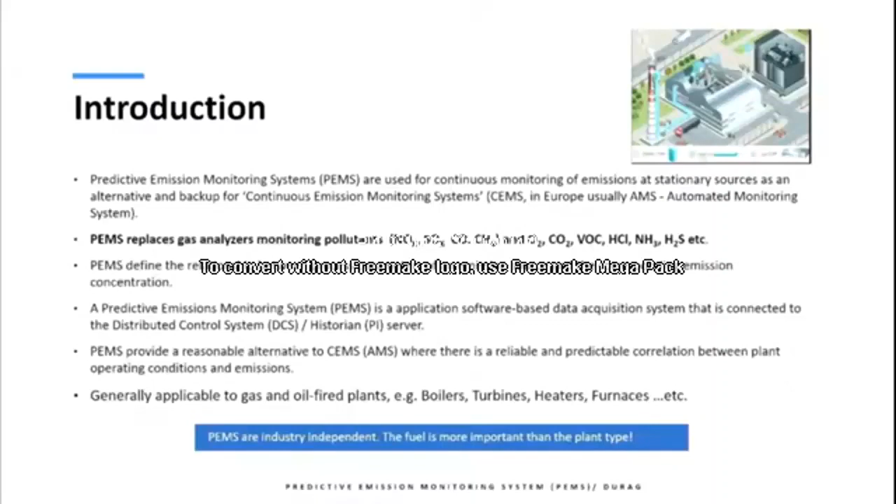But what I want to give you is the experience which we want to share with you, how you overcome the challenges with this technology and how you can make it beneficial to replace any CEMS gas analyzers which you might have challenges with.

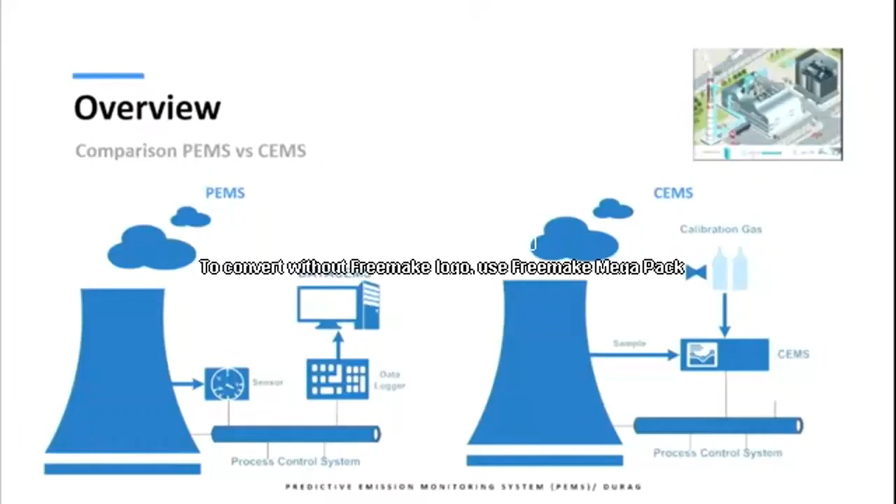Just to give you a first overview, on the right side you see the traditional system, where you have gas analyzers and sampling systems, and on the left side you see the PEMS solution, for example the Durag data CEMS. You can imagine that on the right side, with gas analyzers, I face a lot of issues with the sampling system, the gas analyzer itself, the calibration, and the maintenance.

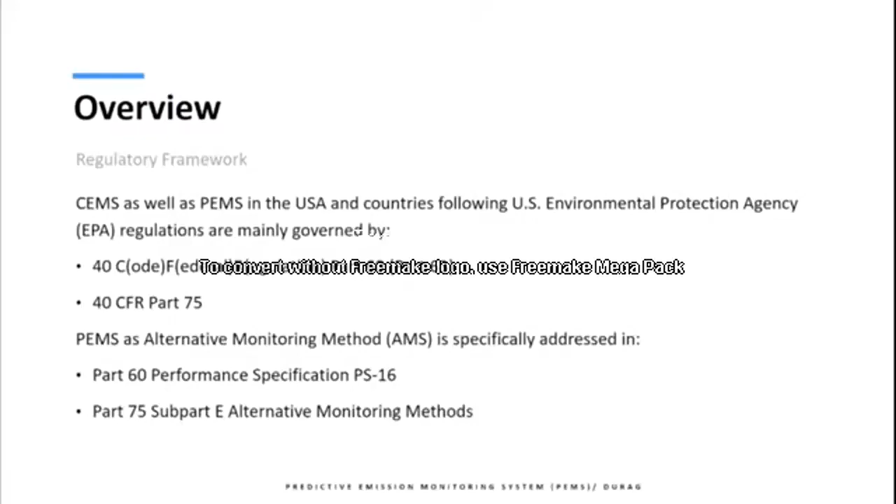The first question to answer: is this approach accepted worldwide? The answer is yes. There is a standard from the US EPA, Environmental Protection Agency, the Code of Federal Regulations 40 Part 60 or Part 75. These are the two major ones implemented outside of the US. Part 75 is more stringent, therefore we advise it mainly for companies inside the US, because there are very stringent requirements which often cannot be met by companies outside the US.

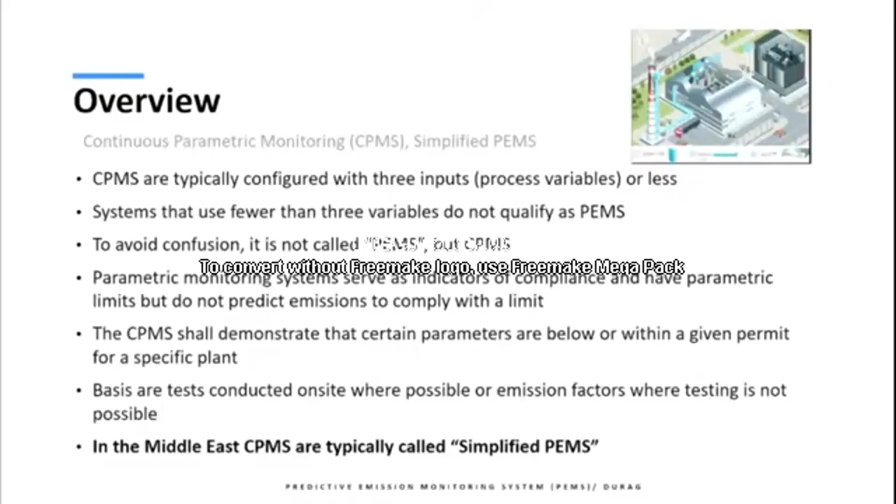Just to clarify, there is also something called simplified PEMS. This is a light PEMS where you just use three process factors or less, and it is often used for flare monitoring. But this is not qualified for environmental emission monitoring, so this is not the PEMS I'm talking about here. It's just for indication, not for reporting. You cannot use it for reporting to the Royal Commission or the environmental authority. It's just for indication, or in case you do not have enough process information to make a sophisticated PEMS model.

How is the model built? There are four different stages, starting with the creation of the PEMS model and ending with the finalization and implementation of the system in your plant. During the first stage, we need to collect the data. How are these data collected? You need a mobile CEMS, a mobile gas analyzer, collecting the data from the stack.

There are specific requirements, and I always urge and remind our clients to look into Performance Specification 16. It's just a 20-page PDF file from the US EPA. It's very simple, and it describes what's required to collect the data and how the load has to be varied, because you cannot collect data at one load and then expect your PEMS to be accurate.

And the same also with the type of fuels. If you are changing your fuel, this has to be incorporated within the PEMS modeling from the beginning also. And in the finalization stage, of course, the PEMS has to be sealed against any manipulation, because the Environmental Monitoring Authority wants to be sure that this data is true and that there is no manipulation from inside the plant itself.

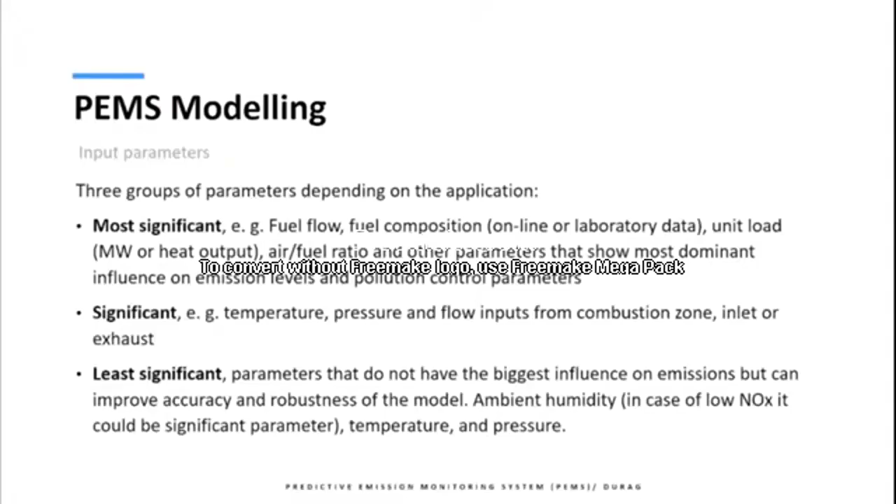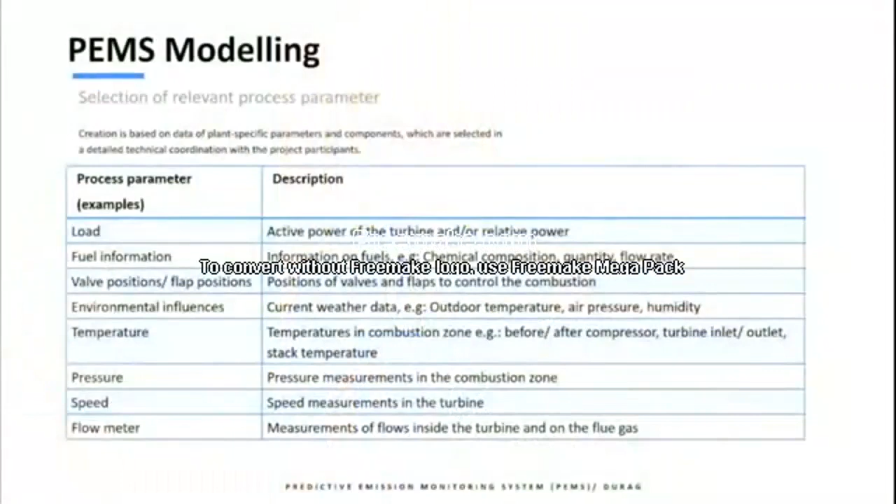And this, you can get the data from your weather station, including, for example, the humidity or the temperature outside, because these have some effects also on the reading of the system. This is just one example for a gas turbine, the different process parameters which are selected there. And here to give you an overview about the PEMS envelope.

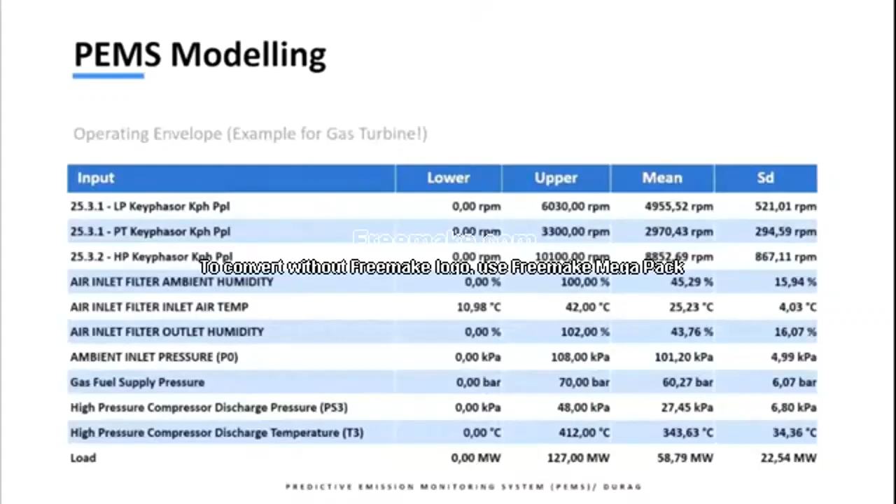And of course, most of these parameters are also important for your process, and you want to know about them, and the system is checking them every minute. Every minute, the sensor validation component, this is part of the software, is active and checking the data.

So the main feature of PEMS is that it is usually used for compliance. You want to demonstrate to the emission authority or to the environmental department that your stack is within the limits. This is the main target of PEMS. However, it can be also used as a backup of your existing CEMS, continuous emission monitoring.

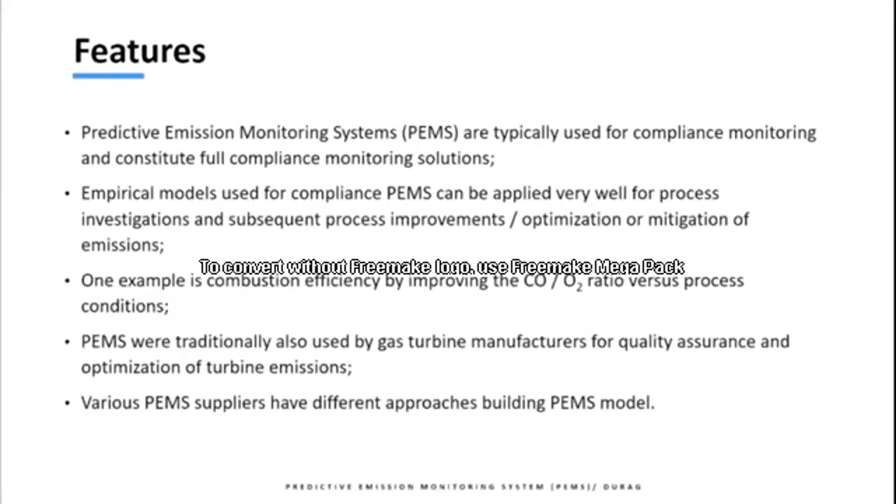And in the past, there are also some simple PEMS which are included by the gas turbine manufacturers, because they want to make sure that their gas turbines are within the emission target which they have. But this simple PEMS is not qualified for emission monitoring.

Just to give you an example of PEMS software, I've selected here the one from DURAG Group called DataCEMS. This is based on multidimensional mathematical modeling and using correlation and chemical formula of the gases which are coming out of the stack. NOx, SOx, methane, H2S, whatever is coming there, there are some formulas, there is some regression between the parameters, between the load, between the fuel composition, the fuel-air ratio on the one side and the outcome on the other side.

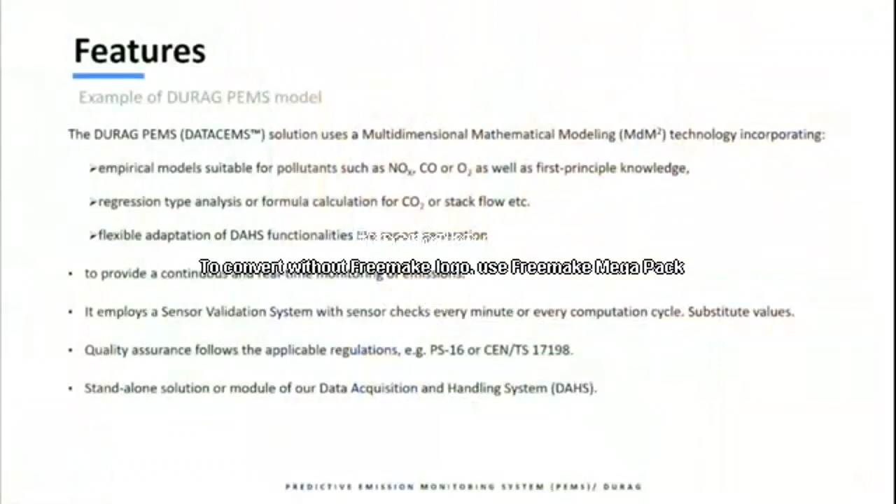And it is a learning software. The more accurate input you put in this software, the more sophisticated it is. And it can be as 99% accurate as the gas analyzers which are used in the first place to build them. And I really like what Mr. Ali Dosari mentioned before, that this monitoring or artificial intelligence is only as useful as the data which you give it. If I do not simulate the load or the fuel changes in my model building, the software cannot master this case either. So this is very important.

The main benefit of PEMS is, of course, the saving. Because less human power is required, less cost on the gas analyzers, less cost on the maintenance. This is the first main advantage. The second advantage is the availability, because it's a software and it's available continuously.

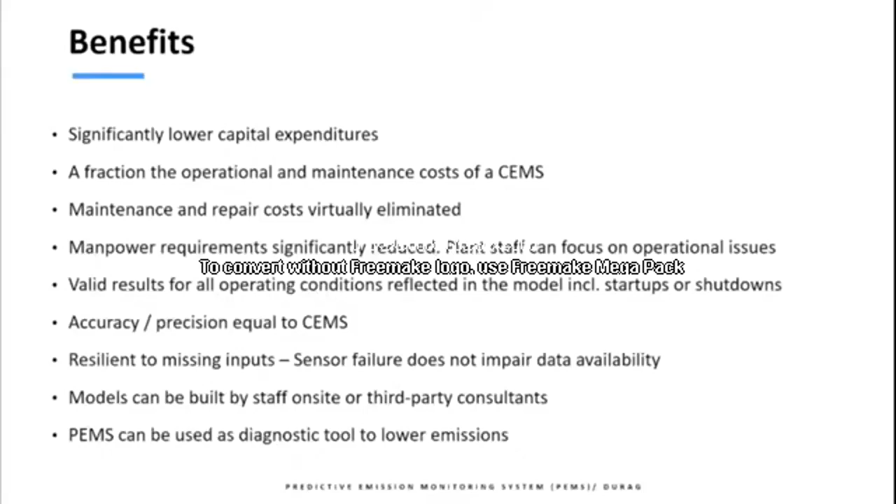Whereas with the gas analyzers, there are some colleagues here from CEMS, they know that the gas analyzers are not always available. And especially there are some very challenging applications where the temperature is very hot, where the stack is old, and I do not have a platform to install my gas analyzer there. These are the cases where we advise to consider PEMS.

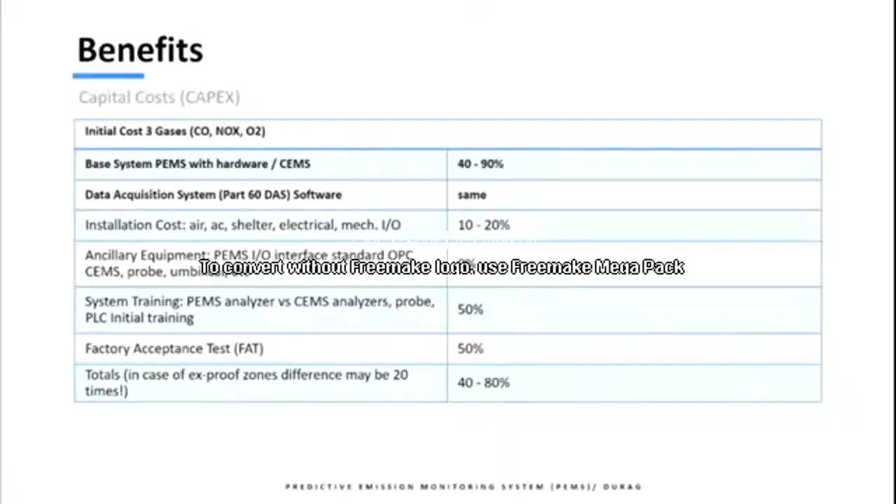Just to give you some numbers, the capex savings are something around 40 to 80%, and I want to underline this point. Please do not go for just simple PEMS, because I have seen many end users implementing PEMS, and after a few years, when I talk to them, they are facing a lot of challenges with them, because it's not about price. It's about the right solution for you and the right project management also. And I will talk about this in the challenges. So the lifetime cost, when you compare the investment of PEMS to CEMS, it's roughly 30 to 40%.

The main challenges, as mentioned: please treat this as a challenging project. You need to involve all the departments in your plant, starting from the IT department to the emission monitoring department, analyzer department, but most important, this project has to be supported by the higher management. Because when we are building the models, we need the plant load to be varied. And we need also in that slot of time the different fuels to be there. Because otherwise, we build the PEMS model, and later on, it's not matching.

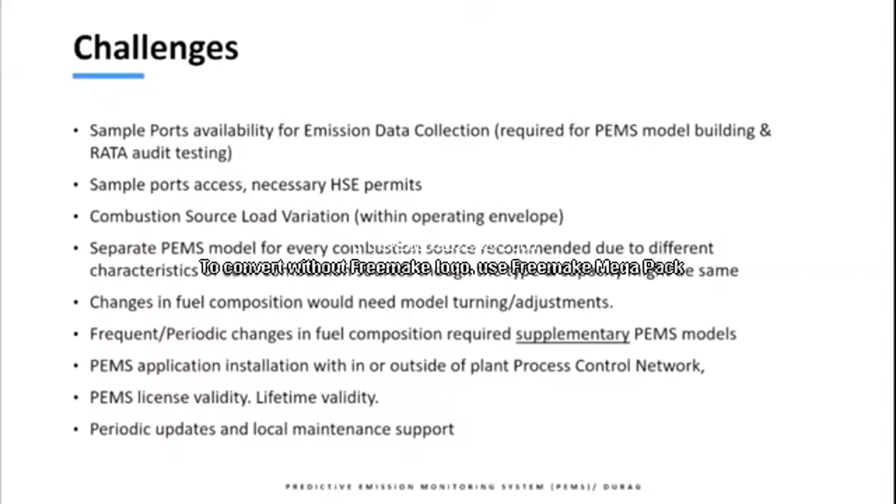And one other point, each stack has its own PEMS model. Even if the stacks are similar, please do not use the same model for that stack. This is something we have seen: clients want to save on that, and later on, after 1 or 2 years, the software is drifting very much. I'm coming to the summary.

First of all, PEMS is not new. It's already there worldwide. And I know that Aramco is using it in different plants. SABIC is a little bit reluctant, because the Royal Commission, when I visited them in Yanbu and in Al Jubail 10 years back, told me, we do not trust PEMS. But in case there are CEMS on stacks where the readings of the gas analyzers are not matching at all, only in that case we are allowing PEMS. So in the current state, maybe they are allowing it.

What I can tell from my experience is that in the United Arab Emirates, ADNOC, we worked with them 7 years back on FEED, and we made there a demo project, and now we see all the affiliates of ADNOC bringing new PEMS projects, more than 400 or 500 stacks. All of them are going to be PEMS, and they do not want to use CEMS anymore. And Kuwait is also starting on that, and we are here to support you in case it's required.